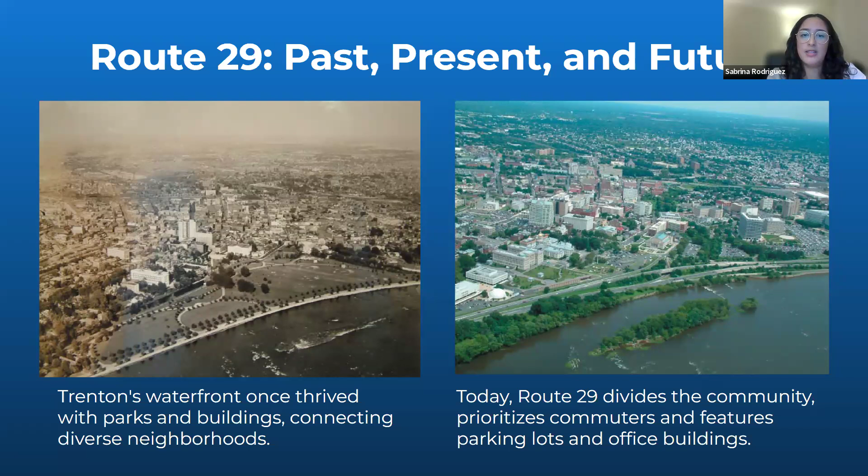This is an image of what Trenton used to look like in the first half of the 20th century on the left. We could see a city defined by a connected Delaware River waterfront, with expansive waterfront parks, grand government buildings, and interconnected neighborhoods throughout. But in the second half of the 20th century, it brought urban renewal, auto-centric design, and Route 29 that we still have today — a high-speed freeway that separated the community from its riverfront, prioritized commuters over residents, destroyed neighborhoods, and left a sea of surface parking lots and single-use office buildings.

And here's where we step in, trying to gather the support to achieve a more connected Trenton. We've done it through the Reconnecting Trenton's Riverfront campaign, aimed to reconnect Trenton to its riverfront by turning the corridor into a pedestrian safety boulevard that reconnects the city to its riverfront. It includes expanding green spaces, improving mobility, and enhancing access to recreational areas along the Delaware River. These efforts are going to help lower emissions, improve air and water quality, and bolster climate resilience along the riverfront.

By reimagining this key area, the campaign seeks to strengthen community ties, boost downtown economy, and create a more vibrant Trenton for all. This campaign is led by a diverse group of partners: local government, business leaders, and residents, with the support of New Jersey Future.

So, how do we accomplish this? And how do we even envision a future without a divisive highway? We started with the basics by reimagining this as a boulevard, which replaces the dangerous freeway with a boulevard. It could enhance safety for pedestrians and cyclists by reducing traffic speed, reconnecting neighborhoods, and building opportunity for green spaces.

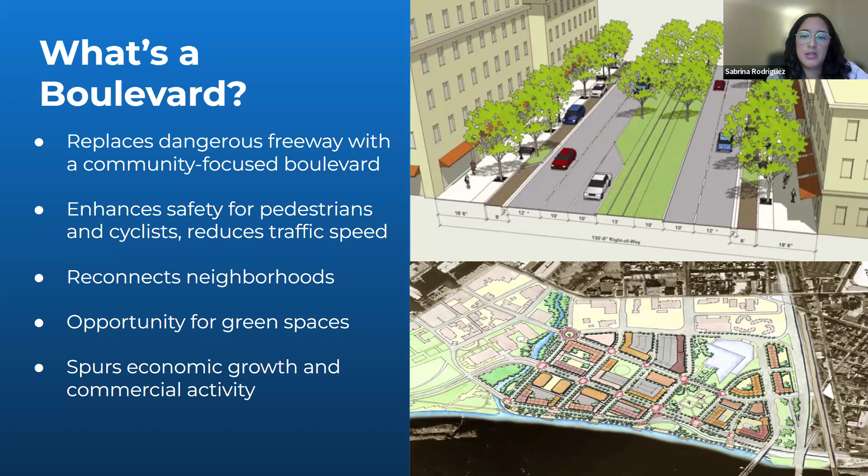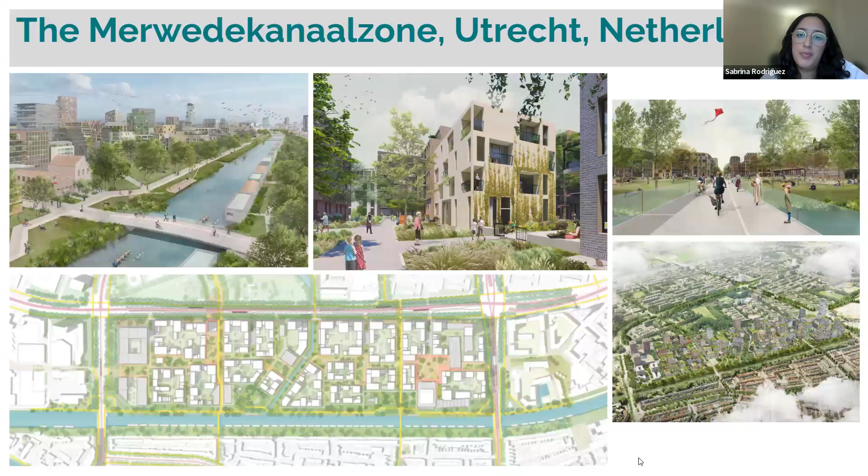This project envisions a more thriving space for Trenton's residents and businesses. It's restoring waterfront access by replacing the high-speed freeway, and providing a reconnected neighborhood with better walkability, bike lanes, and safer crossings - being mindful that the majority of Trenton residents don't have access to a car. We can help drive economic growth by creating a destination that supports small businesses and tourism, all while improving public health and environmental sustainability.

It's very important to note that this is a 10-year project at minimum from now - we've already started, and Matt will talk more about where we're at until the moment this is built. We have a campaign because this project needs sustained support, and it needs to create and celebrate smaller wins, because folks won't see shovels on the ground for this specific portion of the project for quite a bit. So Mercer County and the city have taken the initiative to work on smaller projects in the meantime, such as fixing up the old wharf and working on some streets near the project, alongside other Vision Zero related initiatives.

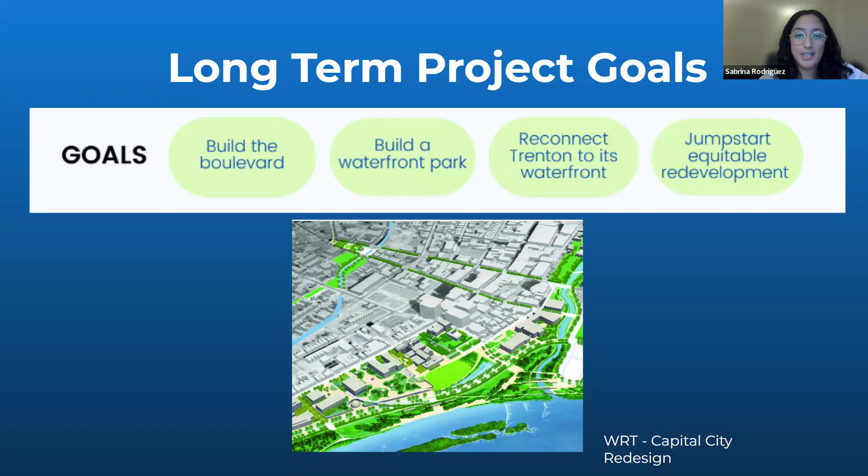And I appreciate you listening to me.

Matt, take it away. Thanks, Sabrina - that was a really nice introduction to the aspirations we have for the waterfront.

As Sabrina said, in the first half of the 20th century there was a wonderful park along the river, Stacy Park. When the New Jersey Department of Transportation proposed building Route 29, a limited access highway along the waterfront, there were objections from the city, objections from the county, objections on a lot of fronts. That goes back to the 1950s, before the facility was built.

The project that we were working on really had its beginnings in the late 80s, when the state of New Jersey created the Capital City Redevelopment Corporation, the CCRC. The CCRC was designed to work with the city, the county, and other key stakeholders, with the state, since it's the capital city, to identify a plan for redeveloping and revitalizing the downtown. So the concept of converting Route 29 into a boulevard really dates from that 1989 Renaissance plan from the CCRC.

That plan was updated in 2023, but most importantly, NJDOT, under an earlier governor with a different commissioner of the Department of Transportation, had its eyes on smart growth in a very significant way, on the relationship between transportation and land use.

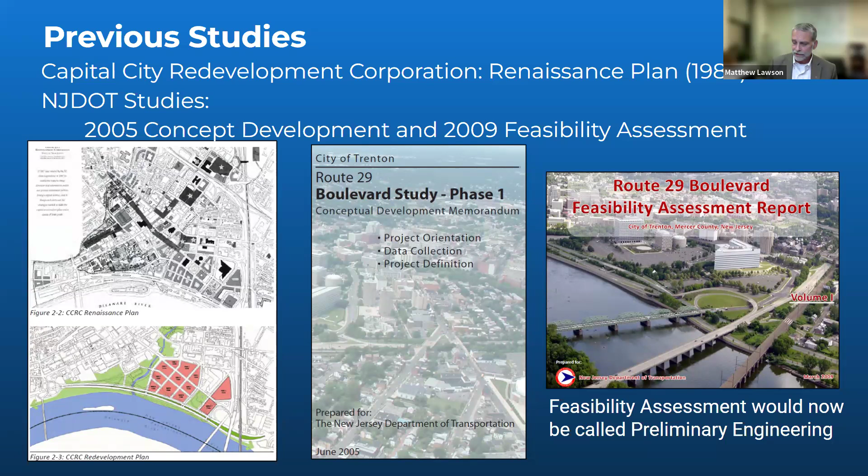So the stage we're in right now in the current project delivery process is concept development. Concept development is basically where you come up with the idea for the transportation improvement. Later phases, preliminary engineering, basically look at the concept and sharpen pencils to see really how it would work. Then final design is acquiring right-of-way, figuring out where construction vehicles will be parked, maintenance and protection of traffic, and the bid specifications to go to construction. Construction is its own challenge.

Where we are now is in the middle of that local concept development process, and this is a county effort. We came at this as a cooperative project with the city of Trenton, with the Infrastructure Investment and Jobs Act, the IIJA bill from the federal government under the Biden administration. There was a Reconnecting Communities program where projects like this were being supported by the Federal Highway Administration, and the county agreed to be the sponsor for a City of Trenton push, restarting this project under that program.

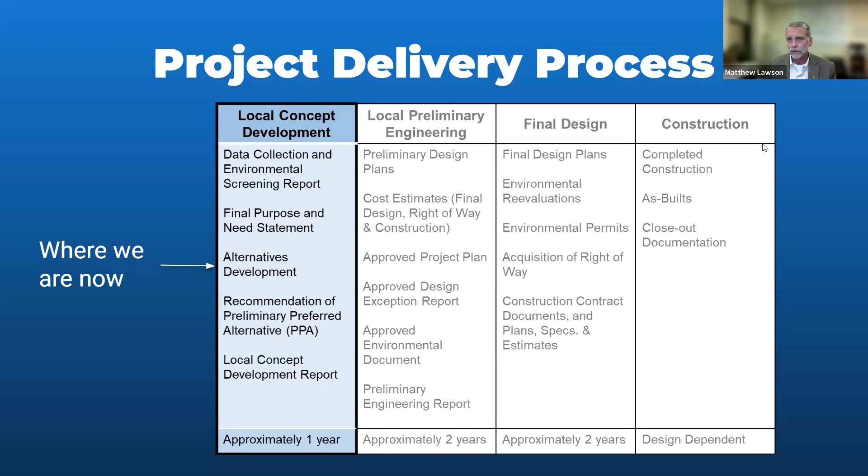What we need to do — let me go back a few slides — in order to move out of the concept development phase into preliminary engineering, is identify a funding source to get us through the design phase, preliminary engineering, final design, and construction. The last cost estimate we had for the inland alignment of Route 29, based on the 2009 plan, was about $200 million. There's been inflation since then, and other cost increases.

That cost, to my knowledge, did not include the infrastructure costs to create the local street grid and other infrastructure we would need — plumbing pipes, water supply and drain, electricity — into this sea of parking to be able to support development. So there's a lot of costs involved in this project.

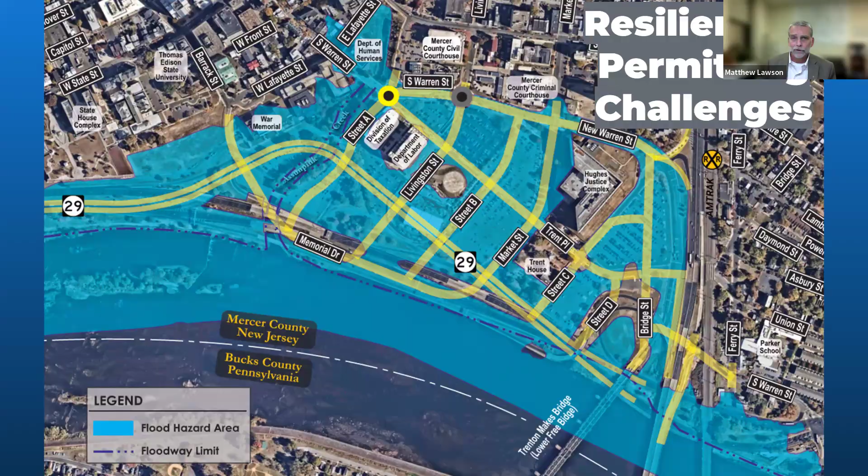We are hoping for a change in administration that will enable us to get commitment from the state ultimately to redevelop those parcels, to build the highway, to build the boulevard. So the project goals for the current phase, for the county's project—and this is the county's project—let me say that when we were working on the Reconnecting Communities discretionary grant, we got a letter of support from the commissioner of the Department of Transportation, basically supporting our effort to rebuild and restart the boulevard project.

And on the basis of that letter of support, we're proceeding with this project. These project goals are very similar to what Sabrina outlined. Stimulating economic development on the surface parking lots is really the number one goal. And that's not so much the Department of Transportation as it is the state's Department of Treasury, which owns the property and makes decisions about parking for state employees. We are hoping that we can get some concessions, if not from the Department of Transportation, from the Treasury Department, to have some control of development and relaunch this.

There's so many open questions, so many difficult things. We want to improve traffic connections to the downtown street network—that's not necessarily improving traffic on Route 29 itself. For many years, this project fell away after the early 2000s because we had a new commissioner of the Transportation Department come in, and the attitude was, we have a working highway, why would we want to destroy a working highway that supplies our workers to the downtown? We're hoping for a sea change on that front too.

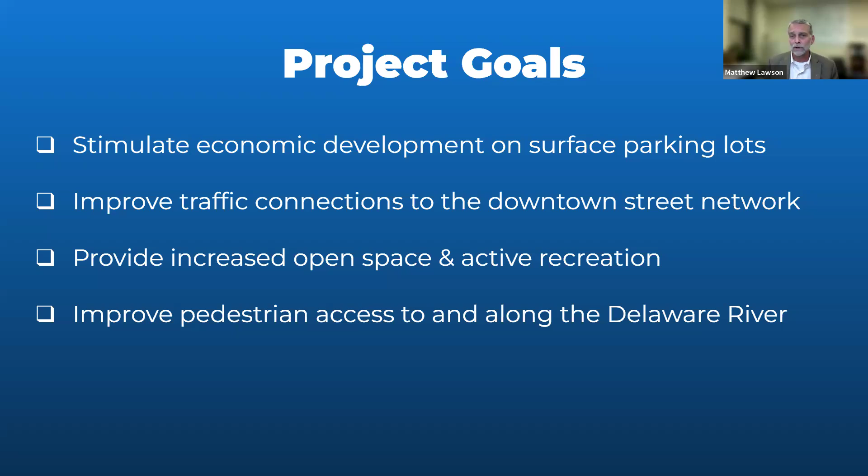Increased open space and active recreation—I'll get to that in a bit in my later slides. Improved pedestrian access to and along the Delaware River—again, later slides. These have to do largely with those resilience goals.

So the project scope, and this is the scope for the consultant that we're working with, Stantec, is to evaluate the concepts developed in the early 2000s. They got quite far along, and so we want to see if those still work, especially with the changes in the flood hazard area.

We want to look at changes in traffic volumes and patterns. The traffic study in 2009 was estimating traffic growth out to 2025. We've actually experienced less traffic growth on 29 and in the downtown than was predicted back then. So traffic volumes are really uncertain, especially with a new microtransit system in the city of Trenton, and other changes we can expect in the transit system with New Jersey Transit. But how can we provide development and resources for people so that they don't have to drive? This is a key element of smart growth.

So environmental regulations—the flood hazard rules, climate change and resiliency—again, the flood hazard rules and potential for increased flood hazard with significant rain events upstream.

What are the fiscal and economic benefits? How does development in this area redound to and improve development opportunities and the status, the ability of the city of Trenton to grow and prosper? And likewise, the community and social impacts of that development.

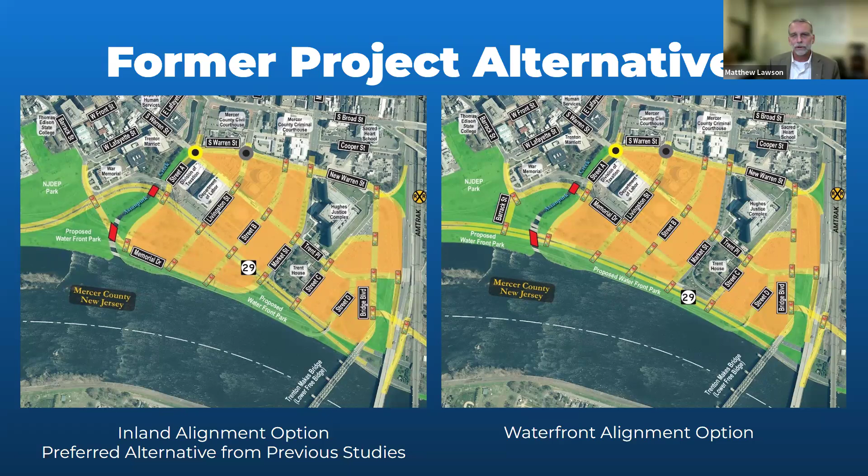The alternative that we're looking at now is there's two of them, and again, the task of this project is to look at those earlier alternatives that NJDOT spent so much time and money developing to see if they still work. Like then, we have an inland alternative and a waterfront alternative. Where we are now is essentially this array for the waterfront alternative. You can see Route 29 basically on its existing footprint.

The consequence of the no net fill rule for the new stormwater regulations means that we have to cut from areas below that flood hazard zone, so that we have fill to enable economic development on the surface parking lots. That means taking other surface parking lots and some of the road infrastructure along the river and eliminating that. In order to achieve the cut we need, we would be taking the elevated portions of Route 29, and other areas.

These infill blocks would essentially become more or less detention basins. We would have to slope the interior streets down to Route 29 along the riverfront. The stormwater rules allow us to maintain the existing highway on its current floodable elevation, so we wouldn't have to raise the highway in this scenario. We would have to raise the elevation of the inland street grids, because the other important rule is dry access for any residential development. Anybody in a residential dwelling has to be able to walk out on the street in case of a hazard.